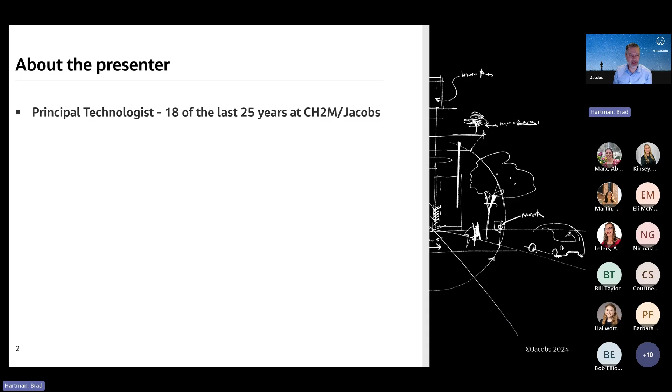Just really quickly about me, I've worked 18 of the last 25 years, 10 years at CH2M before about 8 years ago, we were merged with Jacobs. And although I'm assigned to the Bellevue office there in Washington, I actually live in Salt Lake City, Utah. I finished my graduate studies at BYU in 2001, and yes, we were eliminated from the March Madness tournament a couple of weeks ago or so, like most of us were.

And then I've worked a lot across many Western states, and actually held an engineering license for about 15 years in the amazing province of Alberta, Canada. We did a large design build up there in 2008 to 2010 in the city of Edmonton. And then I also many years ago became credentialed with ASFPM for floodplain management.

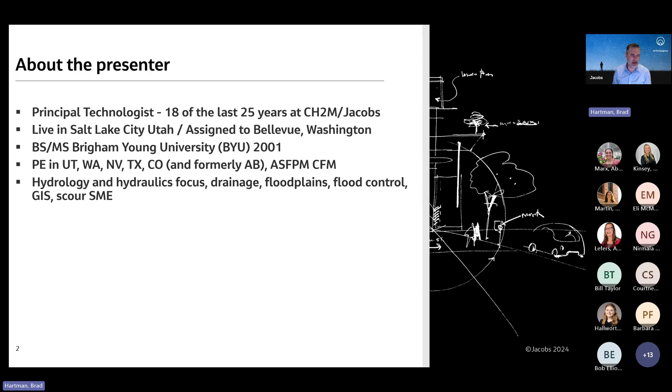Most of my focus in my career, although I think we all get opportunities to do different things here and there, has been with H&H type of stuff, general drainage on highway and bridge, floodplain work with FEMA and others, and just general flood control. And I work in GIS a lot. And then for my company at Jacobs, I serve as a subject matter expert for a lot of bridge scour projects that we work on.

The types of projects that I mentioned I work on span a lot of different things: highway, bridge, aviation, railroad. I belong to kind of a stream restoration group at present with a lot of wonderful professionals across a lot of diverse disciplines. And then I've been doing a lot of wildlife crossings lately, not just AOP or fish passage, but a lot of terrestrial like elk and deer and things like that. We're working on a project on Highway 20 in Skagit County right now, which has been very rewarding.

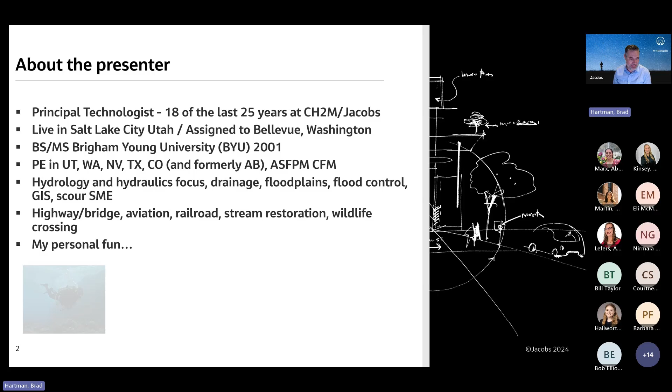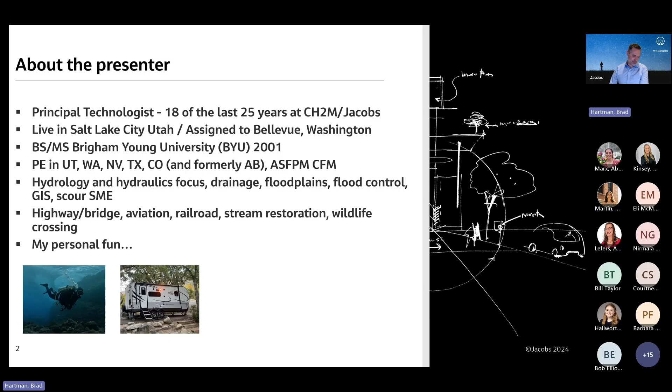Just quickly, personally, I just thought it'd be fun to share some things that I like to do in my spare fun time. This is a picture of me just a few weeks ago in the South China Sea near the Philippines. Really love the sport and experience of diving. And as I share some of these hobbies, if there's any new friends or buddies I can make on the call, I'd sure love to hear from you. This is my happy place in a little box with wheels. This is my little trailer I sometimes take up into the mountains. When I was a little younger, I would backpack, and as I got older, I liked having a memory foam mattress and plumbing and heating and all that sort of stuff.

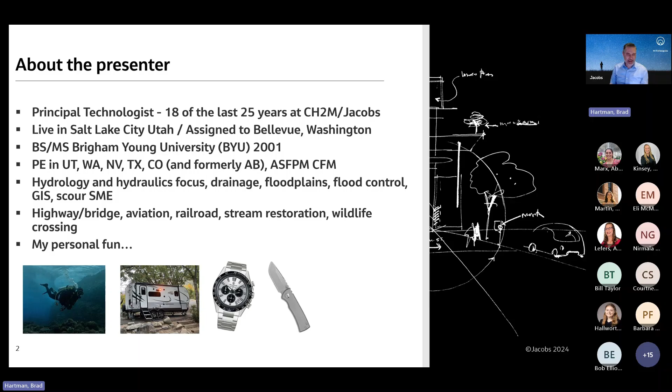I got into wristwatches a few years ago, and this is actually my dream watch. It's well outside my budget right now, but if anyone is a watch aficionado, I'd love to hear from you. And then I had another midlife crisis and got a new hobby of collecting pocket knives, and have really enjoyed that a lot. And then I had my last midlife crisis about a year and a half ago, and I bought myself a motorcycle. Never have I ever been on a motorcycle until I was 50 years old.

And I took a class to learn how to work the dang thing, and it's been a lot of fun for me. This is actually a Royal Enfield for any of you who are motorcyclists. This has been a brand and a bike I've absolutely fallen in love with. So that's just a little about me personally and professionally.

I think what we're going to talk about today is the who, what, where, when, and whys of fish passage in Washington. This is something that's been going on for decades, but has been accelerated in recent years. Our role at Jacobs: we've played a role on numerous crossings of our own, working on the final design and construction of some of these crossings, and the bridge work and the

highway work that's required. But we also had a role as a GEC Prime, which gave me and us an amazing opportunity to work with many other amazing partners and subconsultants, to learn a lot and be exposed to different ways of thinking, different ideas, different expertise, and also to share what I could and what we can.

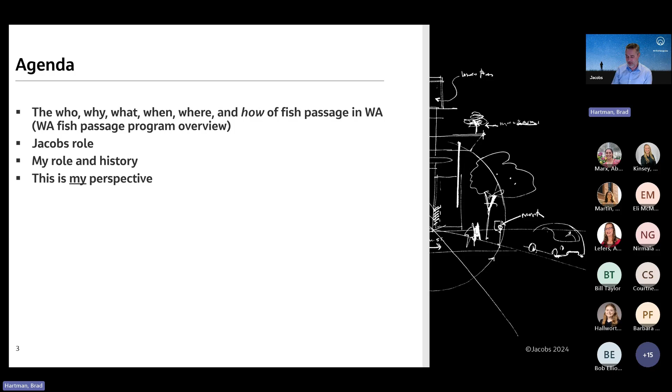I have a heavy hydraulics background, and so we've been working with a lot of modelers to make sure we have good numerical models put together so we can understand what we're doing and make good decisions with the stakeholders and co-managers. Again, this is just my perspective. Others who have been exposed to this work, and I've already seen a couple names on the call that I know, will have different experiences. And if I make a mistake and say something boneheaded, I apologize. Please correct me. But this is just my experience on this program.

I want to spend some time today showcasing what this looks like. This is going to be a little mind-numbing for a few minutes, but I think some of these before and after pictures are extremely telling. As I've shared with other people, particularly outside of Washington, who may not be aware of what fish passage is, what we're doing, why we're doing it, or how much it's costing, I think this really drives home what this looks like when it's all said and done.

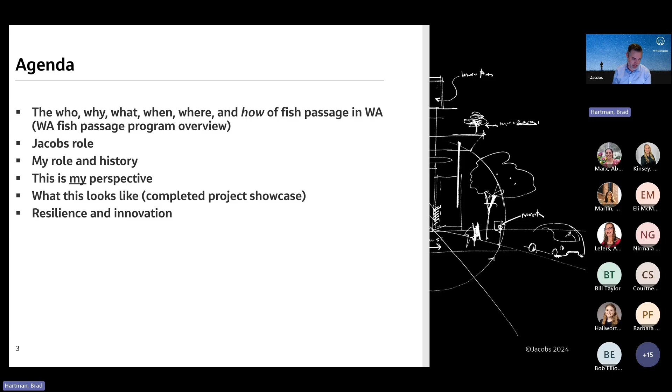We'll talk a little bit about innovation and resilience. We'll talk about floodplains a little bit. We'll mention the design processes and principles, and start wrapping up with flood risk, 2D modeling and scour, and then finalize with some of the challenges and opportunities that I've seen on this program and these projects.

And then if there's time for questions, hopefully there isn't, I'm just kidding, I'll be happy to entertain questions. If I know the answer, I'll share it right away. If someone else knows the answer, please raise your hand and speak up. And if I need to go dig up the answer, I am very happy to do that.

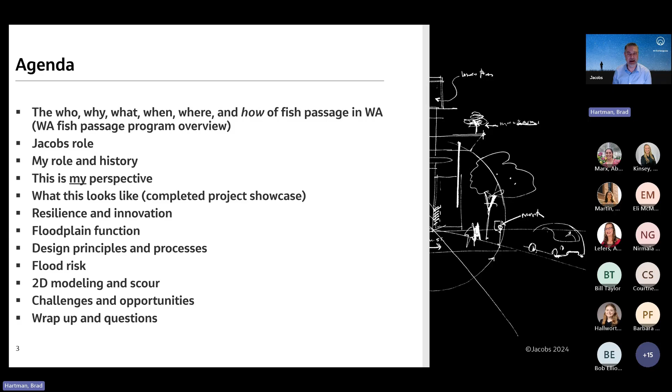So if we're talking about the who in this sense, we've had multiple species of salmon and steelhead trout, which is a salmonid species, where they reproduce and live in freshwater streams, but they also spend time out in the ocean, in the saltwater, and they often return to these streams, or nearby streams where they were born, to swim upstream and spawn and make more salmon.

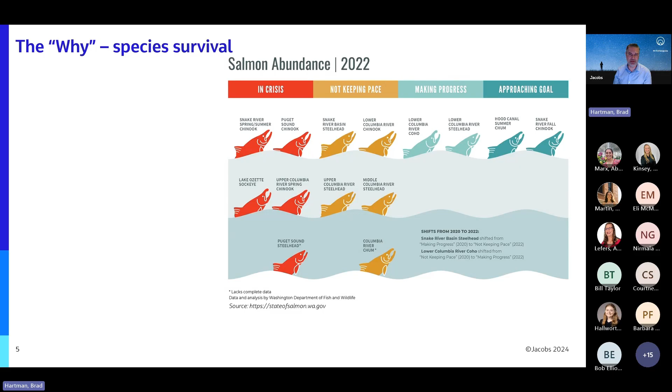And that's a good thing. That's a natural thing. That's what we need. When they can do that and the streams are healthy, that's great. If we've got problems with the streams, they've got a problem. And the why of this, and this is a little bit dated, but it drives home the point that several of these species and subspecies of salmon are really struggling. They're being listed on ESA lists. They're declining in population. Salmon are important for a number of reasons.

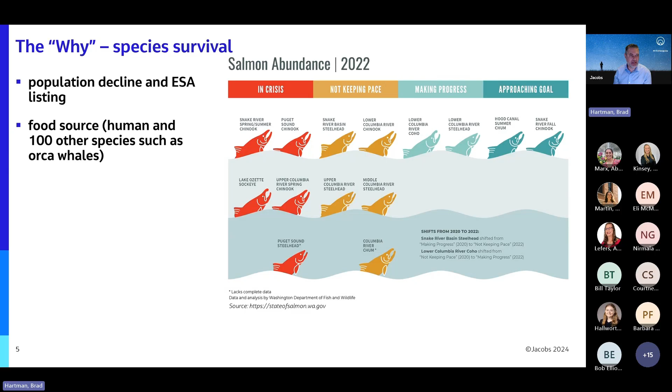They are a food source for humans and many other species. It has a huge impact on the economy and on the Native American Indian tribes that are there in the region. There is just enormous cultural and tribal importance and tribal rights that they have to these fishing areas and to the species and fishing. So this is really just about saving them for dozens of reasons.

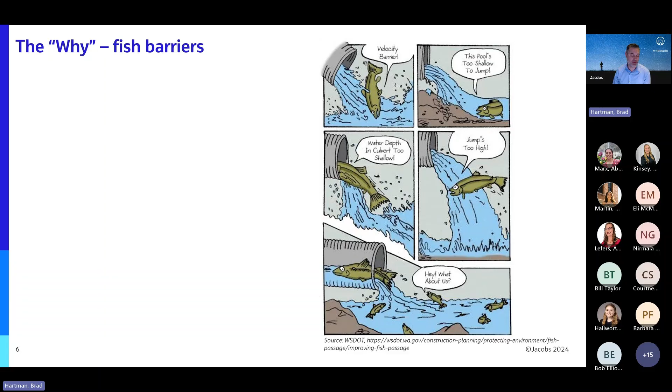The next why, why we're talking about this and why this is such an issue, is because unfortunately, over time, we as humans have created problems and barriers for the fish to do their thing and to go upstream and reproduce. And this is a clever but illustrative cartoon illustration that WSDOT has produced that shows that there's multiple different types of barriers.

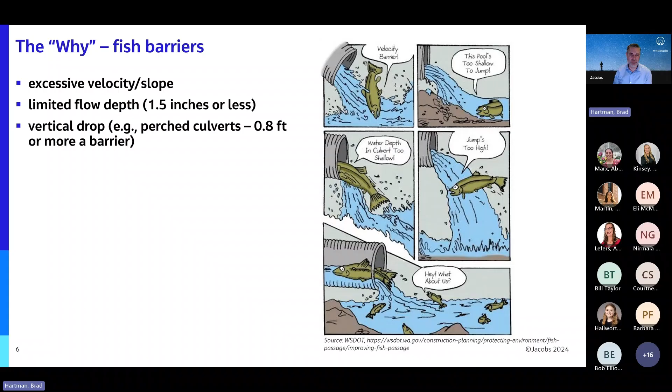They can be too steep of slopes or high velocities that the fish and the juveniles just can't swim against. If we have barely any water, and I've seen some really sad pictures of these fish in their life cycle trying to swim in like an inch of water, that's really, really sad. I've seen drops on the outlet of some of these culverts that are higher than a foot or so, where the fish just can't jump up that, or the younger ones can't.

If there's not enough headroom, if there's grates or bars that are preventing access, and I'm just illustrating with the latter part of the list that there's other things that can produce a barrier to these fish. It could be a dam or a diversion structure. I know dams that were built a long time ago are being addressed, and some of them are even being removed there in Washington and other states. It could be a water quality barrier. It could be a temperature barrier. It could be a levee. There's all sorts of different things that can provide access issues for these species.

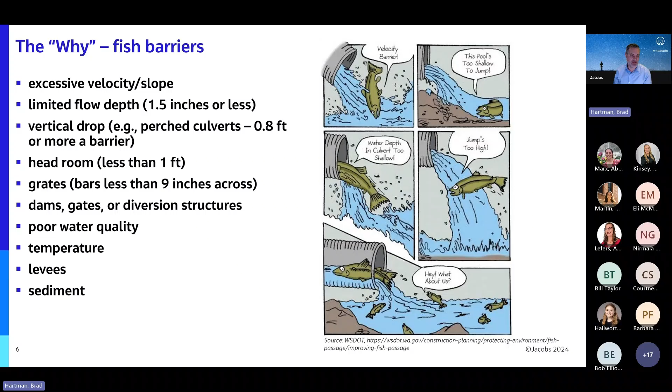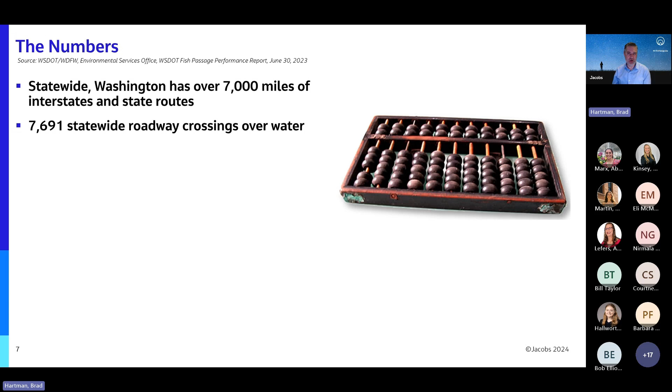So again, just some of the numbers, and I think these are extremely telling. There's about 7,000 miles of just state routes and interstates in Washington. This is not including city and county roads. About 8,000 crossings in these roads that cross over water, and about half of those are considered to be fish-bearing streams. So we've got 4,000 crossings that should be conveying fish upstream and downstream. And of those 4,000, about half, so over 2,000, are considered to be documented barriers to fish. And almost all of those are culverts.

And I know we can debate all day long about what a culvert is, but these are typically smaller diameter pipes that you'll see in some of the illustrative pictures I have that probably, when these were put in, conveyed expected flows, perhaps fine. But as time has marched on, as we've gained more understanding about habitat, they just are insufficient to be suitable for these fish.

So just a little bit of history. There were a lot of treaties over the last century and court decisions early in this century. And in 2013, a legal injunction, a court order, required Washington state agencies like WSDOT, the Department of Fish and Wildlife, the Department of Natural Resources, and state parks to really accelerate correcting these barriers. And like I said, even in the 90s, Washington was aware of these and working to better understand them and removing them. And in this court order, the way I understand it, there's about 1,000 of these crossings that have to be corrected that are included in what's termed the case area or the injunction area.

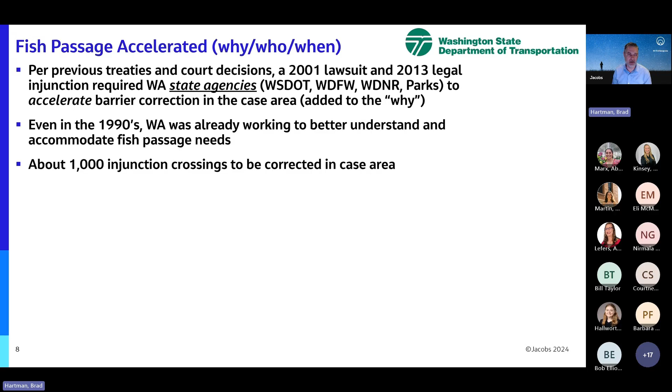And by what year is it? So 4 years from now, 90% of the habitat that was inaccessible has to be accessible and corrected, by 4 years from last month. That's what the injunction states. And that's about 400 barriers, so just less than half of the injunctions that are part of the case area.

And this is a little bit dated again, but as of January of 2 years ago, about 150 of these have been completed. And that's only about 40% of what is needed. So since 2 years ago, many more of these have been corrected. I was looking at the numbers the other day. But they're working very hard. They and us and many other people are working very hard to meet this deadline or to do the very best we can with the funding that's there. This is a very articulated process by WashDOT, and it's evolved over time.

But these are dedicated, committed professionals at the department and all their consultant partners and the stakeholders and co-managers who are working very hard to do this the right way. And I mentioned all those groups just there. This number probably keeps changing and probably keeps going up, but this is about an $8 billion effort when all is said and done. So you can see that the state legislature is probably very involved in trying to understand how they can earmark funds to do what they've been ordered to do.

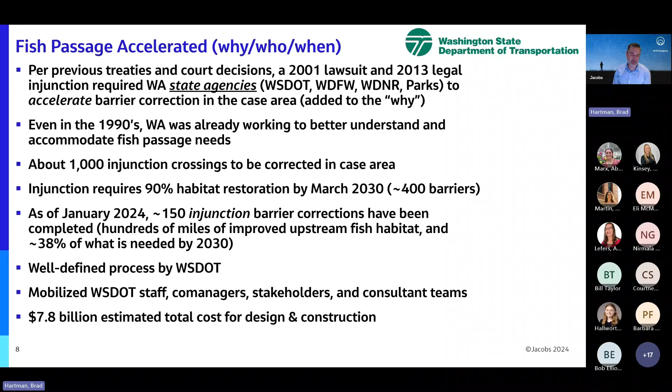This is an interesting map. The yellow boundary you see here on the west side of the state is the case area that was in that 2013 court order injunction. And these red dots are the 2,100 documented fish passage barriers I referred to earlier.

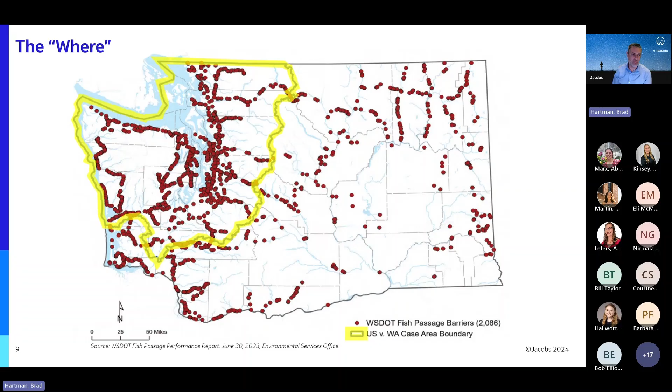And you can just see the enormous density of those, especially in Northwest Washington, where you can see as they follow lines of key highways and roadways, over and over as they're crossing streams that go from the highlands into these bays, sounds, and into the ocean, that there's just so many of these crossings. And again, about 1,000 of these, about half of these on the total map, need to be corrected pretty soon.

This is probably a slightly outdated map showing how many have been corrected since the mid-1950s. So, the red dots on the previous slide were the bad news. These are the good news. We're making lots of progress and continuing to march forward and correcting these barriers.

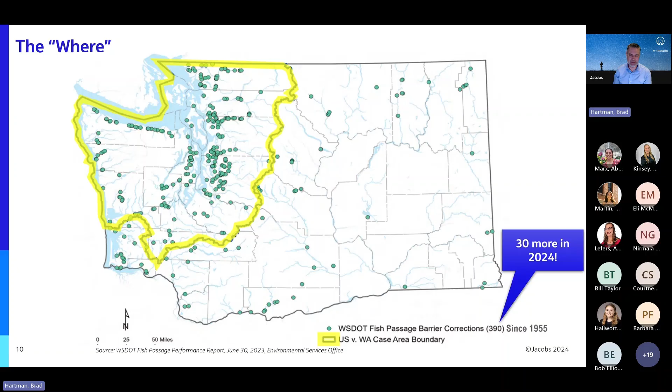There were 390 as of 2023, I want to say. Yeah, that was the fish passage report of 2023. And in 1 year after that, there were 30 more. And then as of the end of last year, there's been probably another 20 or 25 more corrected since then. So great progress.

This slide is coming from, I think, either WashDOT's website or Department of Fish and Wildlife, but it shows the case area again in yellow. And it shows all the barriers that are on the injunction list that need to be addressed. And those are shown in the hot colors, like the reds, oranges, and yellows. And those are different based on the type of blockage it is.

But then you see in the blue squares, the happy color, the cool colors, that many of these are being fixed and corrected as time has marched on. So this has been just really a fantastic thing.

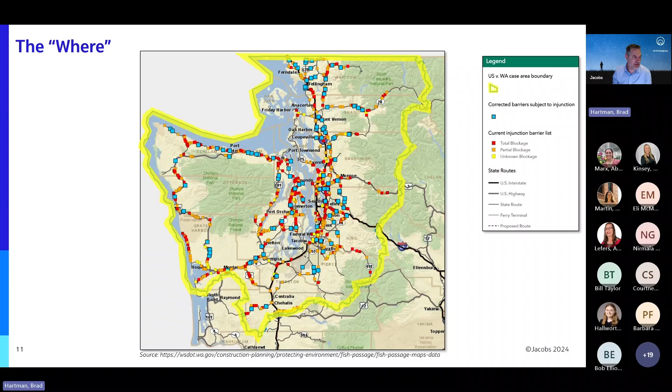As far as the execution of the program, I just want to mention there is so much guidance from WashDOT, from the Department of Fish and Wildlife, from the State Aquatic Habitat guidelines in 2003. These are just 3 manuals that I have referenced a lot, but there's all sorts of guidance documents, all sorts of checklists, all sorts of workflows. It's updated fairly regularly so we can support clear direction and be nimble with new ideas, new innovation that's accepted as a good thing.

Lots of training and communication is constantly occurring, and I'll refer to some of that through my presentation today. And again, just lots of people working together and trying to communicate the best they can to make a really good product at the end of the day. Opinions will vary, and there's sometimes competing interests. But this has been a really wonderful project and program to work on for me.

WashDOT has a couple of different design stages they refer to: the preliminary and final hydraulic designs, typically a PHD and FHD. These are planning level and design level documents that provide all the backup as to why and how we are producing a defensible design for what a crossing should be. And then, of course, design and construction plans are prepared following that.

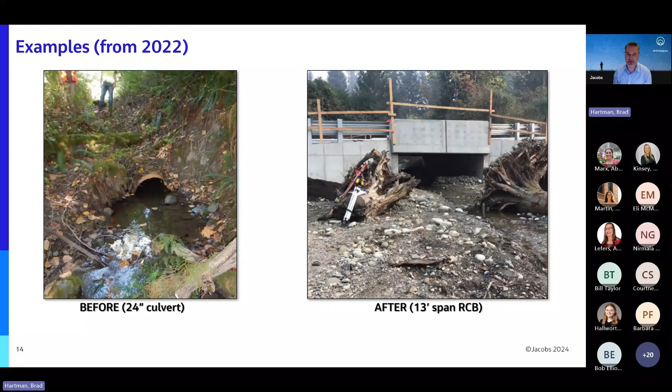And I'll just point out some of these large trees, if you will, that are in the channel. I'll be talking about them a little bit more in the presentation, but those are on purpose and those are by design. Here's another example where they took a two-foot culvert and turned that into a 13 span, excuse me, box culvert made out of concrete. Again, pretty enormous root wads sitting there fairly close to the crossing.

Another example, and these are not all small crossings, by the way. I'm trying to remember this crossing, but I think this was a slope or a velocity crossing, maybe a height. I can't remember, I apologize. But a triple 6x6, and then that turning into a single span over 208 feet.

I mean, you can see all that vegetative fill material that all was removed and put into a fairly high crossing here, allowing that stream to be really fully restored all the way through. Pretty amazing before and after pictures in my opinion.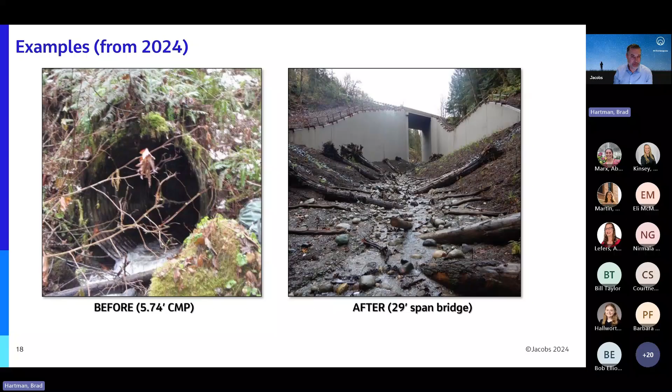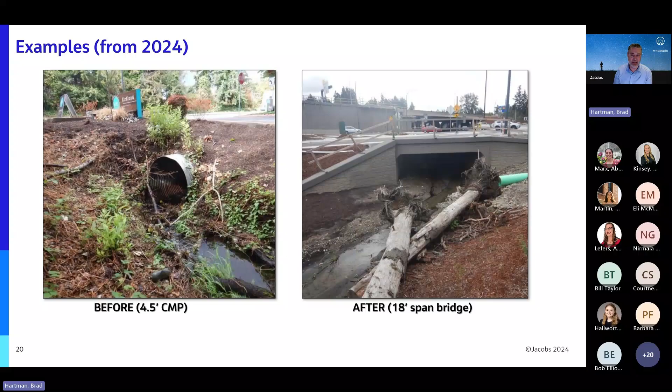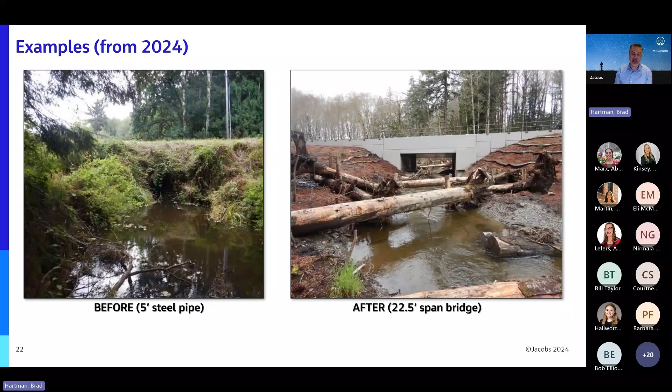Here is a 5-foot pipe that was turned into a 23-foot span bridge. And again, you can see some of those really large wood boles that are even spanning the channel and have some area underneath them. It's really interesting, the different unique designs that we're seeing in these crossings. This is a 3-foot pipe that was turned into a 116-foot span bridge. Again, all that wood there.

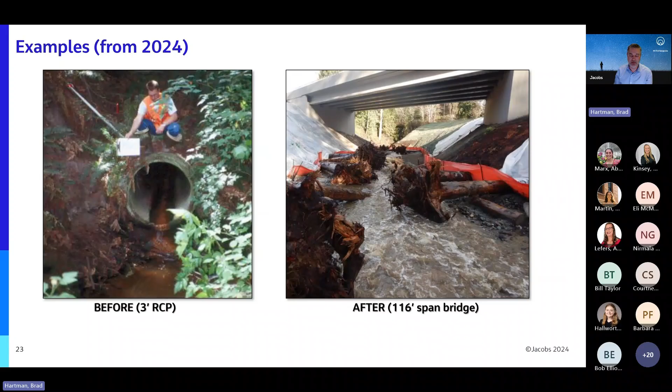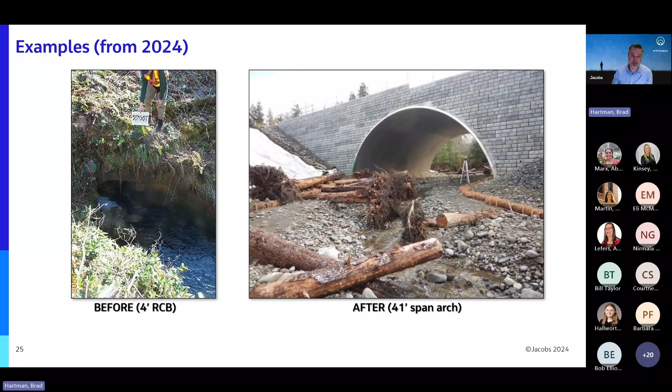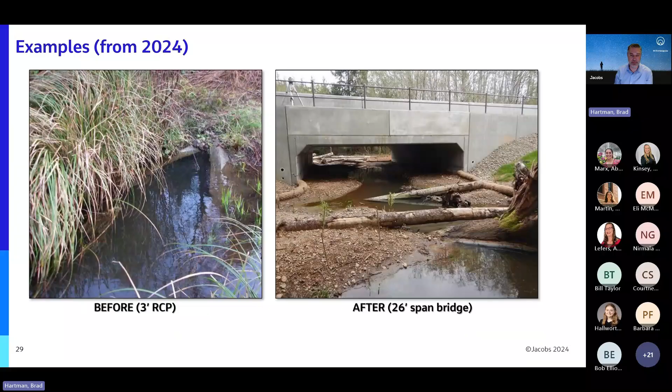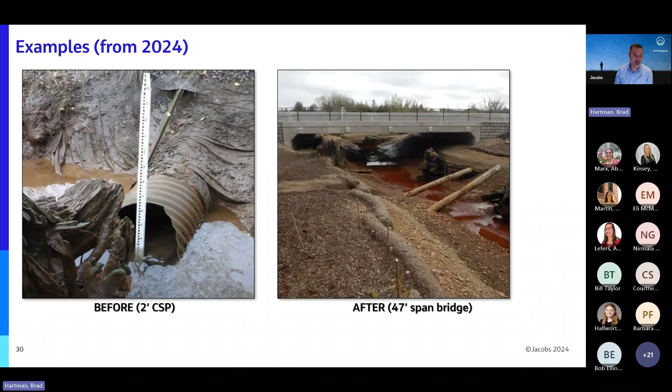I think we're getting towards the end here, but just bear with me as we show a few more of these before and after pictures, which again I think are extremely interesting, not just from the layman's perspective, but even from this community too. Here, this relatively small podunk 2-foot steel pipe turned into a substantial bridge here.

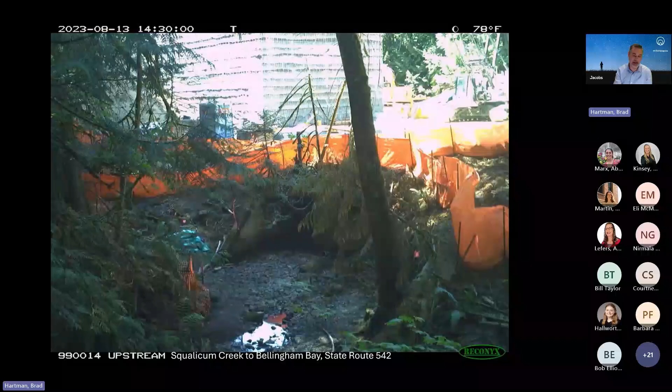So I think you get the idea of the before and after pictures. I think the next thing I want to show you is a time lapse that one of my good friends and colleagues at Jacobs, Gabe Ing, provided for me. I don't know exactly who gets the credit for setting it up and recording it, but this is pretty far upstream in North Washington State, across Squalicum Creek, and this is a creek that flows to Bellingham Bay along State Route 542. Probably many of you maybe live up there or have driven up there.

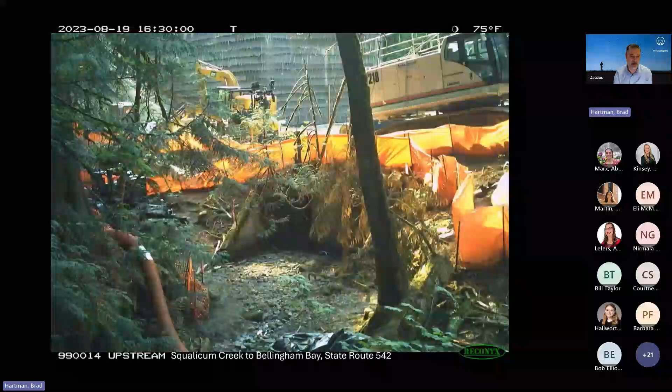But this is in August of 2023, and you can see here, beautiful area. You can see a big box culvert there in the bottom. I think these are 30-minute time lapses. And you can see here, I can't remember if it's the end of the month, might be the end of August, that box will just all of a sudden disappear as it goes away. I love the temperatures on the top right. Washington is so amazingly beautiful and cool in the summer, which is what I like. But you can see the temperatures as we get into August, September, and October, that these temperatures start dropping.

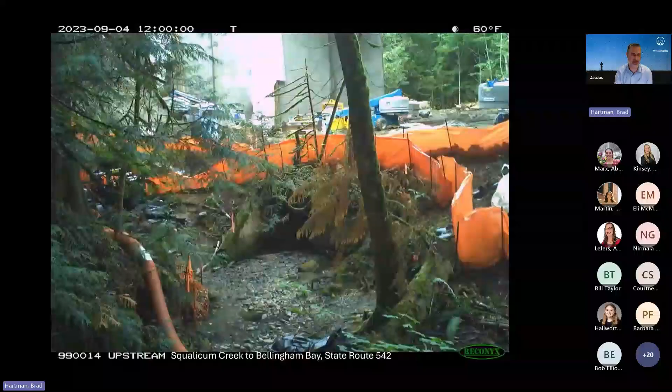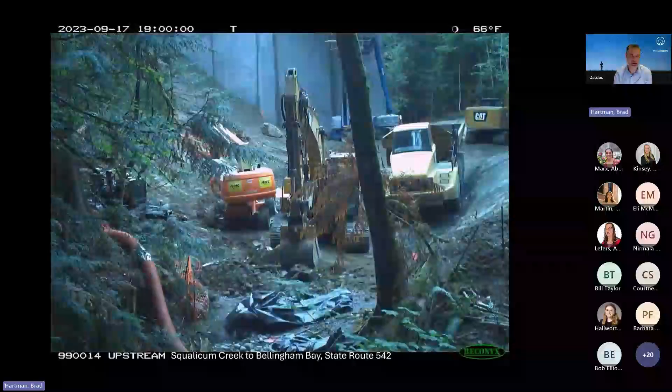So I apologize. I guess we're in early September. Maybe it was mid-September. This box starts to disappear, but they're working on the bridge structure in the background, and they're doing a lot of prep work. But here, I think towards the 15th of September, you'll see that box all of a sudden be removed, and they start working in the channel and start getting it prepared, and there it goes. So that's gone. They're doing the grading that the stream designers and the biologists felt was the right way, restoring that stream to what they think Mother Nature wants it to be.

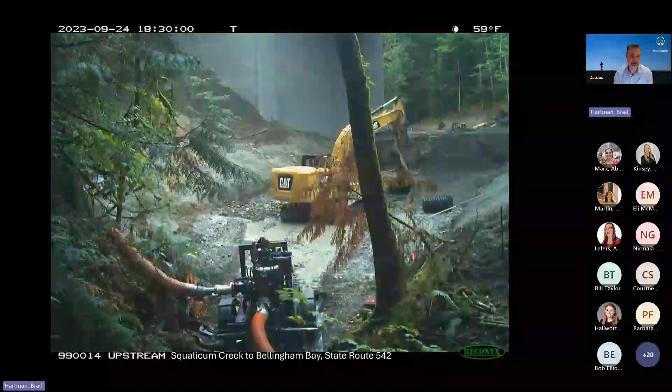And you'll start seeing some revetment coming in, some large wood being staged and put in the channel and then put on the different sides. And there you see that coming in right there, just staged for right now. It's not a dam they're building. They're going to start putting that in different angles and orientations along the creek bed. But again, this is a fairly substantial bridge crossing, both span and height, compared to what was there before. So I think this is really amazing.

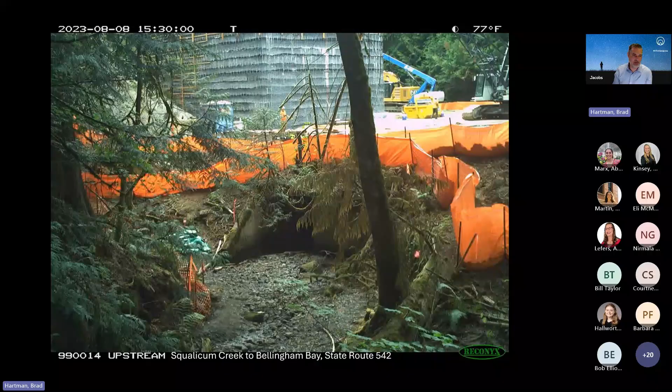It's going to stop and reset back to the beginning of the video here in just a second, but I wanted you to just see what this looked like now that we're in the 40 degrees temperature range. Okay, there you go. So that's back to the before. So I'm just watching the time here.

We're okay. Just want to talk very high level and generally speaking about how this is done, and to remind you that we are trying to reconnect neighborhoods. As I work on more and more wildlife crossing projects, it's been seared in my brain that as we've developed as humans and built roads and bridges and neighborhoods and shopping centers, we are often cutting off habitat that both terrestrial animals and aquatic organisms and fish have been using for eons to move. And as we cut those off, and again, I'm not a biologist, but it impacts their habitat. It impacts the herds that are able to mingle and reproduce with each other. It starts impacting their DNA, and really they start fighting for survival and food and safe habitat and all those different things. So it's the same thing with fish.

We're really reconnecting those neighborhoods that have been plugged and cut off for a long time. So we're not talking about fish ladders here. We're talking about restoring what Mother Nature thinks probably should be there if we can get inside her head the best we can. We are building in stream complexity. So if you go to a lot of streams, they don't look like concrete channels or flumes. We don't want an ecological desert where there's no imperfections, there's no scour holes to rest, there's no areas that fish can be protected from predators. We want to balance this out the best we can. And we want that floodplain function sometimes to even continue through the crossing.

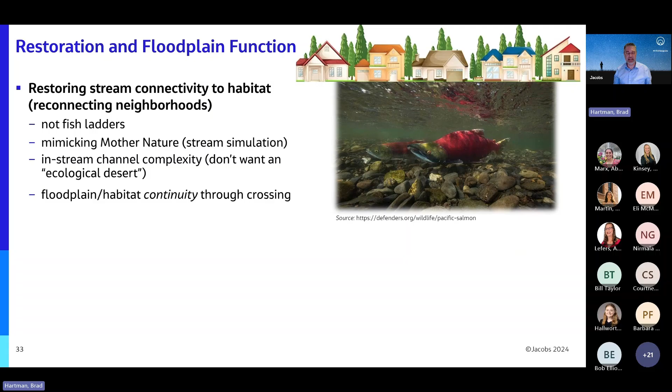It's a different mindset where you might say, hydraulically speaking, I can get a 2-foot pipe, punch a hole through this roadway and get the design flow through the culvert without exceeding headwater limitations or meeting headwater requirements. But we're talking about more than water molecules here. We're talking about fish. And having these floodplains be in as many areas as possible has all sorts of different functions and benefits that I didn't know before working on this project. It deals with the food chain, it deals with nutrients being built up and released, it deals with areas for change and room for the stream to move and meander and do what it will do over long periods of time. And so there's just lots of functions to floodplains other than just storing and conveying water.

Oftentimes, we spend a lot of time in the field, and those of you on the call who've worked on these projects probably know this. We're spending a lot of time looking for what we term reference reaches. We are looking for stable areas that are natural and consistent in the area of this stream, ideally, that give us really good clues as to what Mother Nature wants for the stream.

I had someone describe it to me once as reading the land, but we're trying to put our calculations and our calculators and our computers in our back pocket for a minute and say, what should this look like? What does it look like upstream somewhere that is healthy? And can we do that? And again, we're looking at the geometry, the slopes, the floodplain and how wide the flow is at low flows.

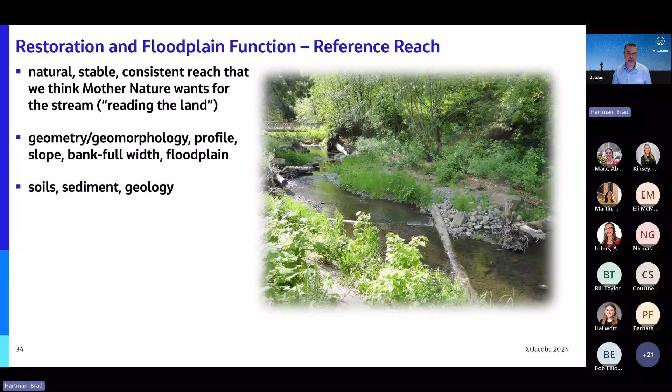We're looking at the soil, sediment, and geology. We're looking at the vegetation. And we're looking at these channel complexities and habitat features. So in this picture, you see some timbers that have naturally fallen over the creek, or rocks that are jutting out, or areas that are vegetated and areas that are not, or sandbars, and these quote unquote imperfections that make this stream beautiful in Mother Nature's eyes and make it function, because this was formed over long periods of time, in a healthy, ideally healthy way. And that's what we're looking for.

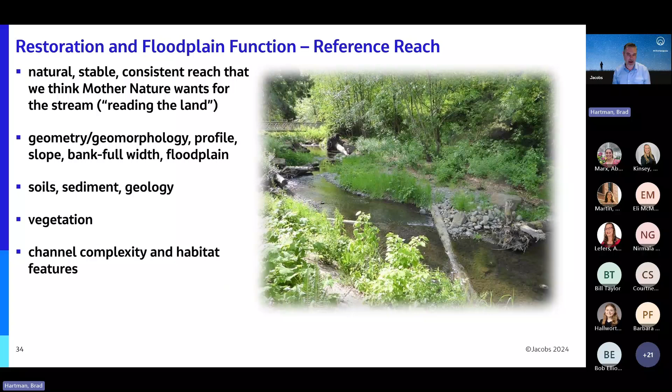Like I said, the answer is usually in the field, but we will get our calculators out and start looking at our best understanding of hydrology. What do some of the high flows look like? What do some of the low flows at bank-full elevations look like? And we're looking at USGS gauge stations. We're using computer programs like MGSFlood. We're doing the best we can.

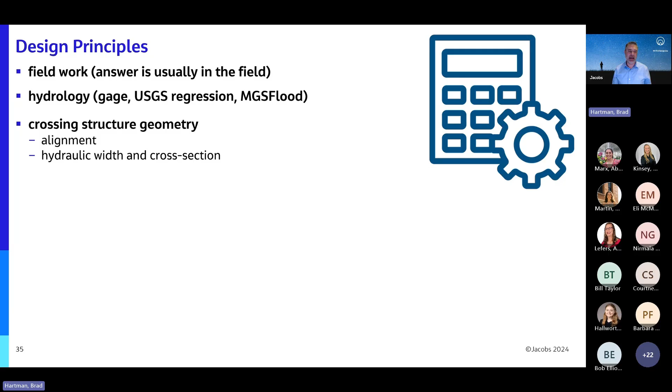And what does that cross section look like? Is it a V ditch? Is it a trapezoidal ditch? Are there benches? What are the side slopes? What should the freeboard be? We spend a lot of time designing a new stream bed material. We're going to be pulling out some of the stream bed material that's there now, and putting stuff back in so that it is stable, resilient, functional, it matches, it's doing the things it needs to do. We're very careful about slopes.

We're very careful about velocity and gleaning what we can from the hydraulic models. And of course, then we start looking at channel complexity features, like that large woody material you saw in those previous photographs. What do we want to put in there? There are means and methods and ideas that all sorts of people have on this, and there are standard procedures for designing that.

And I'll just mention more of my world of things. We spend a lot of time developing two-dimensional hydraulic models, typically in SRH-2D for DOT work, that help us ask and answer all these what-if questions and iterate through different designs, making sure that at the range of flows we expect over the long term, we know how this channel is performing in terms of shear stress and velocity and all these different things.

And because in many cases we are uncorking these crossings, I have heard that word used before, we're taking what might have backed up water before and might have even diverted water on the upstream end to some other place, and now we're opening that up. What does that mean for upstream and downstream?

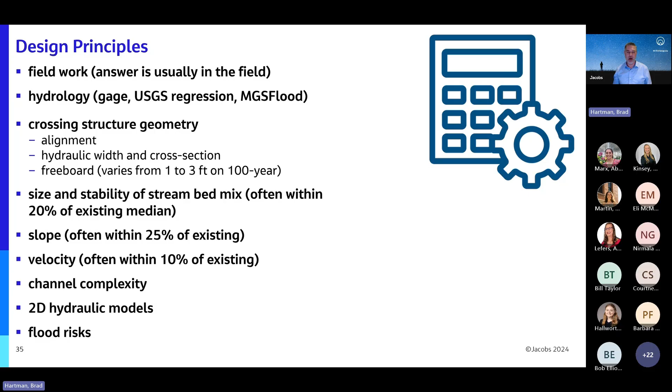What does that mean for properties and structures and habitat and everything else? So we're looking at those flood risks as well. I just want to mention here that we're looking also for resilience over the long term.

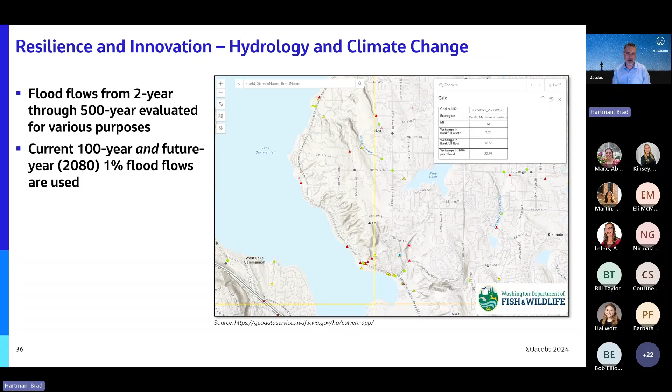I know that we consider sea level rise and tidal influences, but also we're looking at a wide range of flows all the way up through the 500-year, but also even what we expect 54 years from now. What do we think the 2080 100-year or 1% flows would look like? And WDFW has a very helpful tool that for each of these documented crossings, someone has estimated that in 54 years, at least in this case, the 100-year flow rate will increase or could increase by about 23% just due to climate change.

And we run through these calculations both for the crossing design, but also scour on all of these crossings. I mentioned sea level and tidal influences before. And then going to, again, under the topic of resilience and innovation, talking about channel complexity.

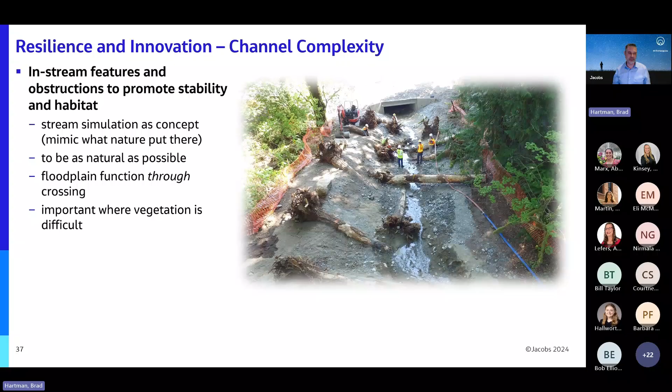We're wanting to be as natural as possible. We want to provide that floodplain function through the crossing, as I mentioned earlier. And we want to do these things especially where revegetation might be difficult. As an example of a channel complexity option that we have, one thing that one of my colleagues here at Jacobs, Dr. Tyler Foudy, has worked really hard on, working with WSDOT with studies and experimentation, is the meander bars.

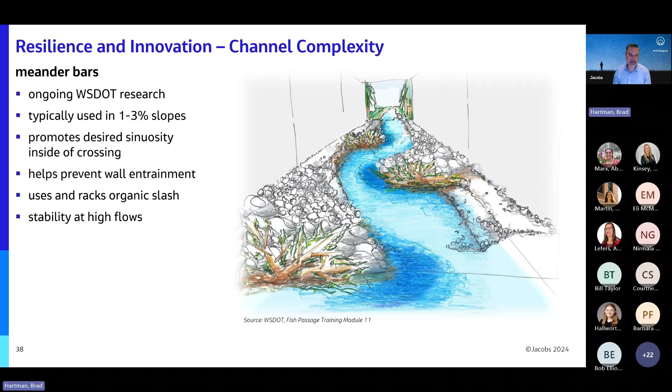And they're still studying these things, and we use these often in some lower slope crossings to promote sinuosity and to help prevent the flows from entraining against the walls and just sheet flowing all the way through. These usually are designed with organic slash at the heads of these structures that also rack additional material as time goes on. The bar height, the top of these rock meander bars or lateral bars, is typically set at like a 10-year flood flow elevation, but they are designed to be stable at high flows.

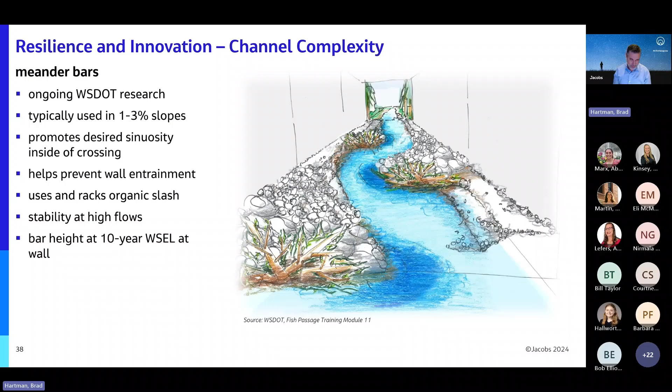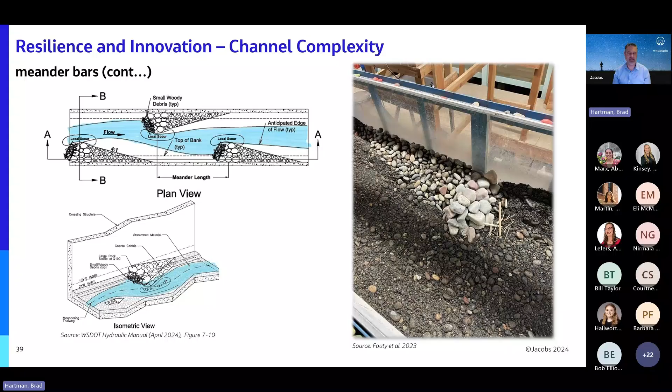So just really great research and ideas that evolve as time goes on, but using the best available practices and the best available science and knowledge that we have at the time. And of course, we're learning. So I've mentioned large woody material several times. It is large. I think by definition, anything that is over 6 feet in length and 4 inches in diameter is considered large in this context.

It typically involves the log, sometimes called a bole, and the root wad together. It can provide protection and stability for the creek. It also provides habitat. It lowers velocity. It produces scour pools for predator protection for some of the smaller juveniles and younger fish. We include these typically in one form or another in all of our hydraulic models, and we'll refine their presence as we finalize our models towards the end.

We don't always put these below the roadway. It just depends on a lot of factors such as freeboard, but in these pictures as an illustration, you can see that they're put upstream and downstream of the crossing. And in the short crossing itself, they'll use other features. Again, these are designed with intent, and they're anchored down and ballasted, resisting buoyancy force, and intended to be stable for high flows.

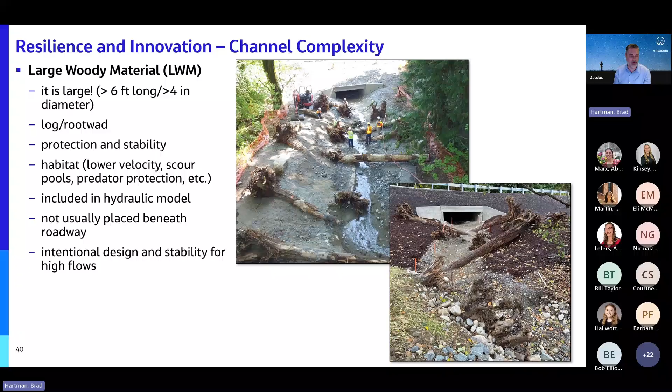Just a few other things, and again, I'm starting to get into areas that I'm not an expert in, but I think it's really fascinating, all the channel complexity tools and tricks that we have. So that would include small woody material, other names that they go by are slash and hog fuel. These are sometimes mixed in with the stream bed sediment for stability and different organic processes.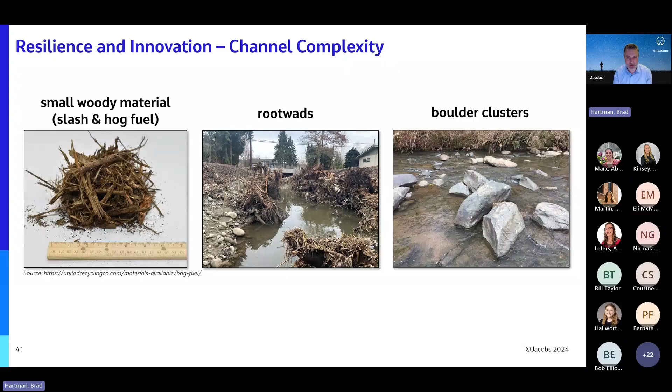Sometimes we use root wads without the trunk of the tree to have woody material in our crossings. They look pretty gnarly, but I just find it fascinating, all that we're trying to do to use all the tools we have in nature to provide healthy crossings. Boulder clusters is another example that I've seen used.

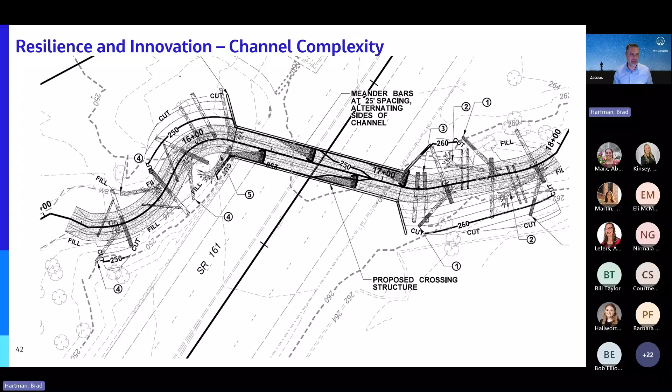And this is just kind of a screenshot. I don't remember which crossing this is, I apologize, across State Route 161. But you can see on our preliminary and sometimes final design plans what these look like. In this case, we have plenty of large wood being shown upstream and downstream, within the limits of grading of the project. And then you see these lateral bars providing that sinuous stream flow at low flows inside the crossing. So I just think it's great to see these illustrative pictures.

I want to talk a minute about these flood risk assessments. I know many of my colleagues have worked quite a bit on these, as have I. And this is a communication instrument that WSDOT requires so that we understand, hey, there's all this fish stuff we're dealing with, but we're also talking about water molecules here. So we've got to figure that out.

So whether these crossings are mapped by FEMA or not as a special flood hazard area, we are looking to identify early on, are we increasing any risks to public safety, to property, and are we meeting floodplain requirements, be it from the FEMA NFIP or any local jurisdictions like King County or any counties or cities on these new design crossings. So we are looking at impacts to the water surface elevation. We're looking at the inundation limits to the floodplain. We are looking at what that might mean for important features, typically downstream, in terms of property or structures.

And really, like I mentioned, it's a communication tool to identify early additional permitting or strategies that we might undertake to protect life and property as well as the fish. So, can we achieve a no rise? Are we going to need a conditional letter of map revision? Can we adjust the design to minimize or reduce or even eliminate the impacts that we have? So that's really what this is.

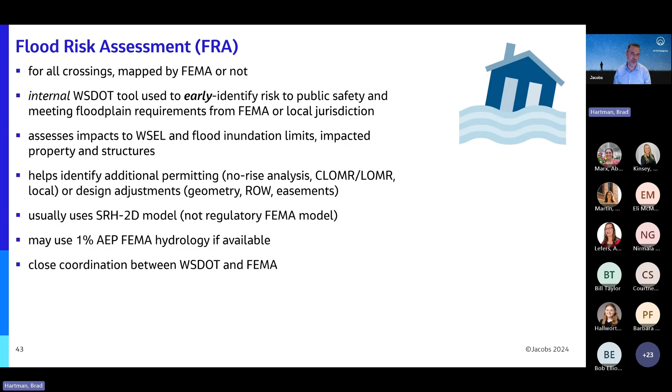What I'm showing on the screen is just an example of an FRA exhibit. We are producing plan view figures. We are looking at this in cross-section. We're looking at this in profile. We're putting values in tables. And you can see this is across State Route 3 near Kinman Creek. And you can see in the aerial on the left, let me do a laser pointer here. Here we go. You can see my bouncing ball.

Okay, so the upstream end of the previously existing culvert, which was a 36-inch, was here in this red X. The downstream was there in that red X. So you can see a good example of how we have realigned the crossing a little bit. And we're putting on some of these observation lines or BFE lines, and we're looking in the white to cool colors at areas where the water surface elevation has dropped between pre-project and post-project conditions. And then we're also looking in the reds, oranges, and yellows, the hot colors, at where water surface elevations might have been increased.

Typically those are limited areas, typically downstream, even though these are typically steady state hydraulic models that we're doing. By opening up this crossing, it just changes the whole hydraulics of the site. You can also see in green hatch, these are areas that were previously inundated that now have become dry. So you can see some of that backwater on the upstream end that's no longer there. And then on the downstream end, you can see some areas that are now flowing with some depth of water that weren't before. And again, the corresponding cross sections and tables.

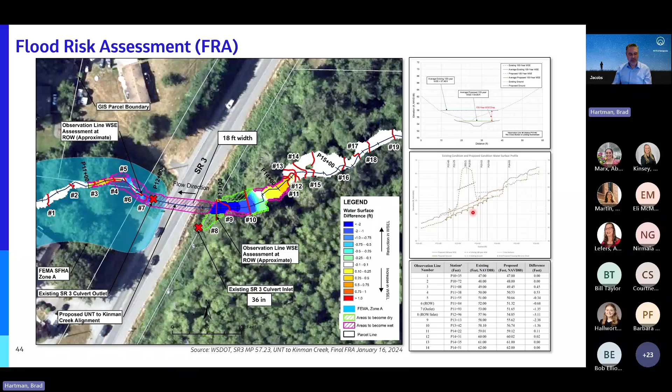And again, it becomes challenging because you can see some of the stark differences. I mean, sometimes we're changing the whole stream bed. We're not just building a Costco or a Walmart in the floodplain and saying, hey, how did this impact us? We're changing the whole stream. So we're just trying to understand what that looks like. And so these FRAs are a great point and mechanism to do that, even prior to ever getting to a permitting document like a CLOMR or a LOMR.

This is kind of the area where I've spent a lot of my time, the modeling. Again, we're using SRH-2D. I have a quote up here by George Box, which reminds all of us that these models are not perfect. They are our best mathematical approximation of physical processes, and we're trying to make them as useful as we can to understand and predict what will happen with our proposed designs.

And as I worked with many great people over the last four plus years, we have some amazing modelers and some great people across 30 plus companies that are exercising their judgment, doing their part to restore some of these crossings. And we at Jacobs spend a lot of time teaching and mentoring and helping people follow best practices for this two-dimensional modeling. And it includes, how are we developing good terrains for use in the model? And do we have a good computational mesh?

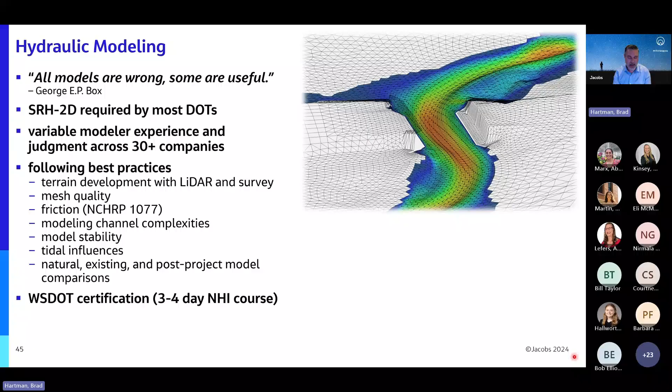And are we understanding the Manning's n values correctly? And how are we modeling channel complexities? And then just numerical stability and dealing with tides and really making meaningful comparisons and meaningful predictions as to what our crossing should look like. And again, WSDOT has recently rolled out a certification requirement. It's like a 3 or 4 day course taken through the National Highway Institute that requires people to work on modeling for these crossings. So a lot going on.

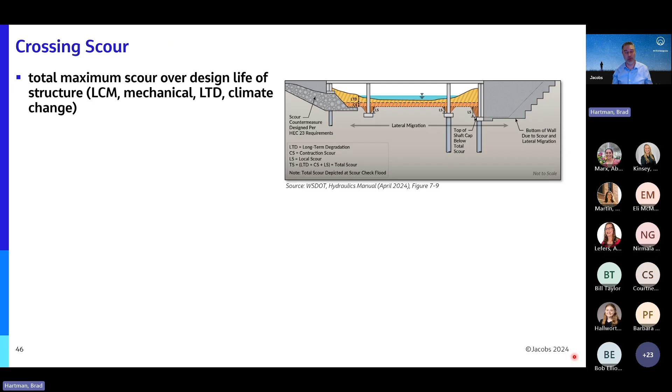And then also the other major role I've played is in scour. We are always trying to understand the total maximum scour to be expected over the lifetime of the structure, both long-term vertical incision, but also if the flows are being constricted, and typically they're not. Typically we're opening them up, but that mechanical scour and again with climate change. So we're just trying to understand how to protect the bridge as a DOT asset after we've done all we can for the fish. And it's a very complex topic. There's constant ongoing advances and direction that we're coming up with.

It requires some experience. And one thing I'll just say here is, if you read HEC-18, and that's kind of Federal Highways' master Bible document for bridge scour, it's often within the context of we are going to constrain and constrict and contract this flow. We are going to build some abutments and some embankment, and we're going to put in some economical pipe or culvert or bridge, but the flow is going to have to squeeze through this.

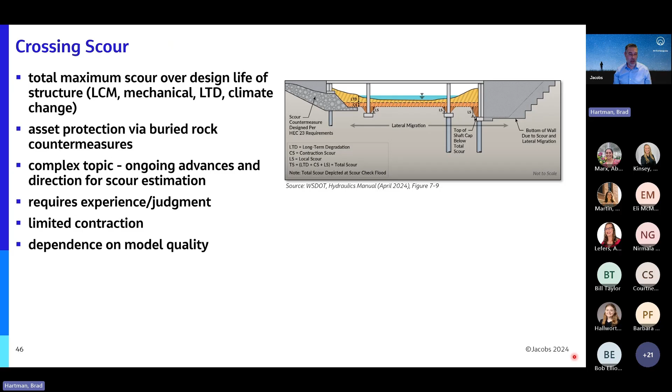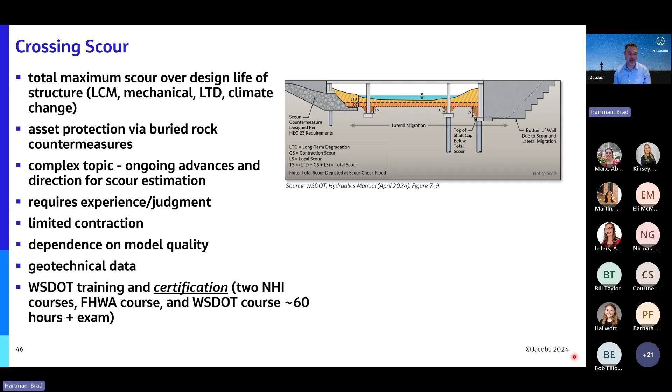And in many of these crossings, it's just the opposite. We're opening up the channel a little bit more, and there really isn't a contraction, but we still have to do our due diligence to make sure we understand the potential total maximum scour that could occur in some of these streams. It really is dependent on the quality of the hydraulic model. It requires coordination with geologists and geotechnical staff. And also WSDOT has a training and certification process for this that requires about 60 hours for an individual to sit through and then take an exam.

So I'm just watching the time, got about 9 minutes left. Let me try to kind of wrap up here. I'm just looking at the leftover slides.

These are like your children if you have kids. They're all completely different. They have different reference reaches, different levels of urbanization. I've seen some of these crossings go underneath hotels. I've seen some of these crossings be highly constrained. Some of these crossings are extremely long and extremely steep.

But right upstream or right downstream, there'll be other barriers to fish passage. It might be a city or a county road. It might be a private culvert or a private road or something like that. And I believe all of those will have to comply with law in future years. And so it can seem really frustrating or counterproductive to say I had to fix this state barrier, and now the fish have another 20 or 30 meters of habitat, but right at that point there's another barrier that when that gets corrected, they'll have another 400 meters of habitat to gain access to.

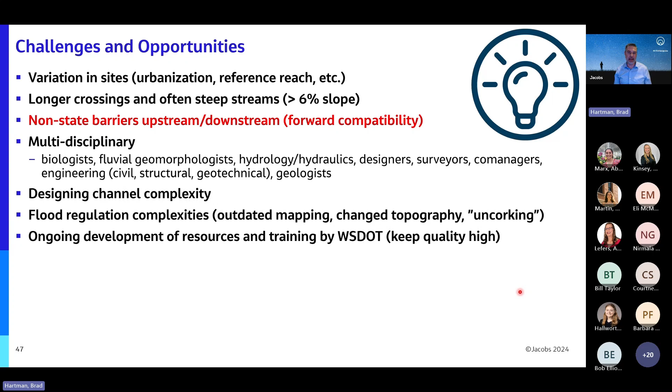I mentioned designing channel complexity is not always straightforward, but it's an iterative process requiring thought. I mentioned already the flood regulation complexities of dealing with outdated mapping or changed topography or opening up these crossings. There's ongoing changes sometimes in training that is appropriate to keep the quality high.

And I didn't mention this yet, but sometimes we get into what we call retrofits or performance management situations where we designed the best crossing we could, and we are heavily monitoring these crossings in the weeks, months, years following construction completion. But we might find out that something went awry, something didn't work, something got damaged, some erosion occurred that we didn't expect. And so WashDOT, I think by the injunction and by practice, are watching these crossings for quite a bit of time after they're constructed. And we've had a few of these experience some failure in some form, and we've gone in to do these retrofits. So this is a learning experience for all of us.

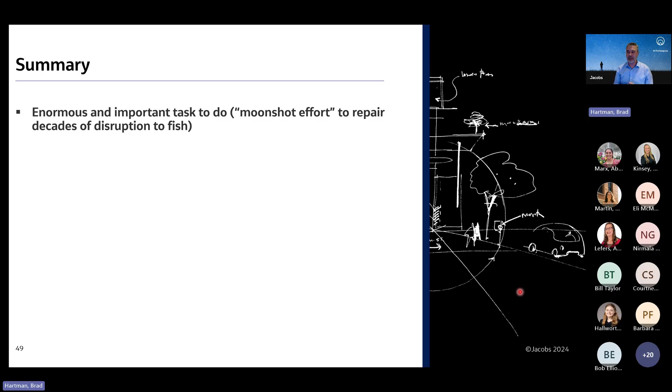But this has been described as a moonshot effort. I think it's really appropriate that right now we've got the Artemis 2 capsule barreling on back to the Earth after going into space farther than humankind has ever gone before. And the pace at which we are going here has never been done by any other DOT, to repair literally decades of disruption to fish.

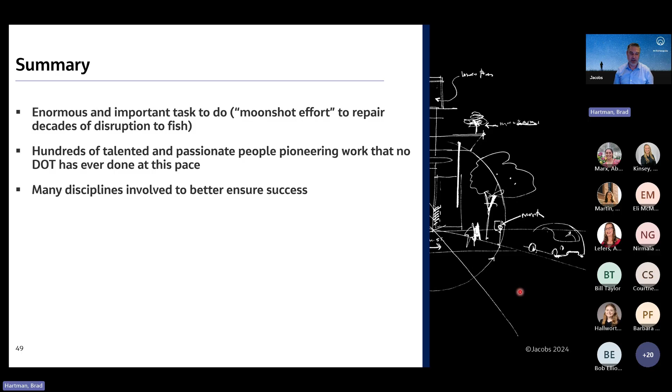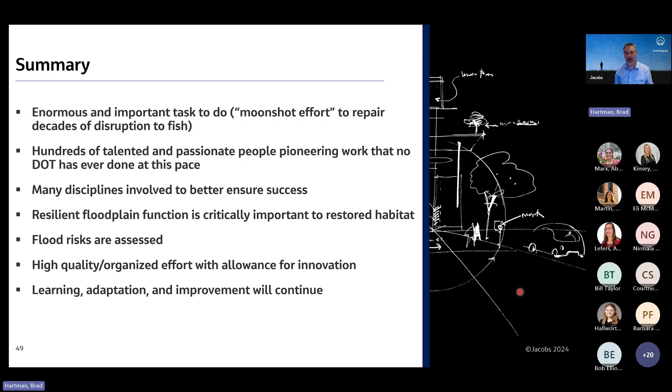There's many disciplines involved. That's a good thing generally. We're trying to provide long-lasting habitat that will work for these fish. So in decades, if not centuries down the road, our kids and kids will be grateful that we did this. We're looking at flood risk. And again, this is a highly organized effort that does allow for innovation, however, and the learning and the improvement and the adaptation will just continue. The best things are yet to come.

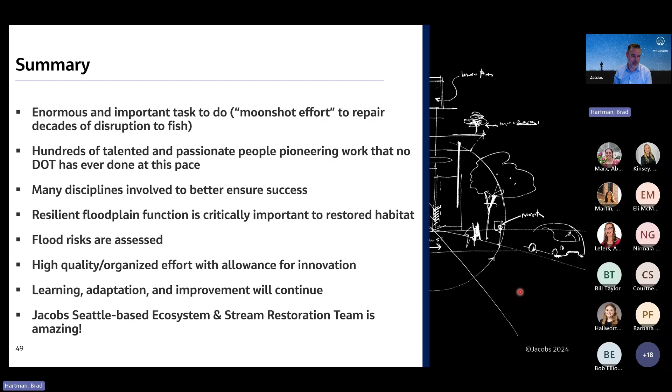And I just want to give a shout out to our Jacobs Seattle-based ecosystem and stream restoration team. They're absolutely amazing. And I say that with all due respect to all the amazing people that are working in this industry all over the country and especially in the state of Washington.